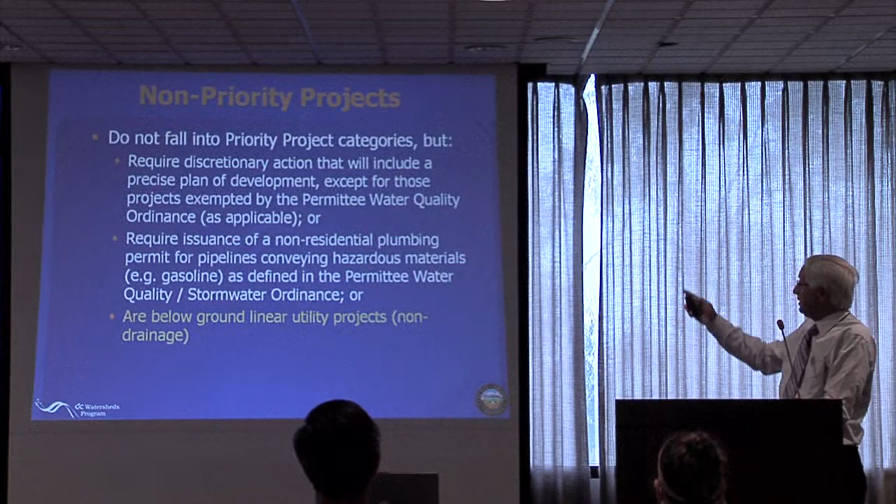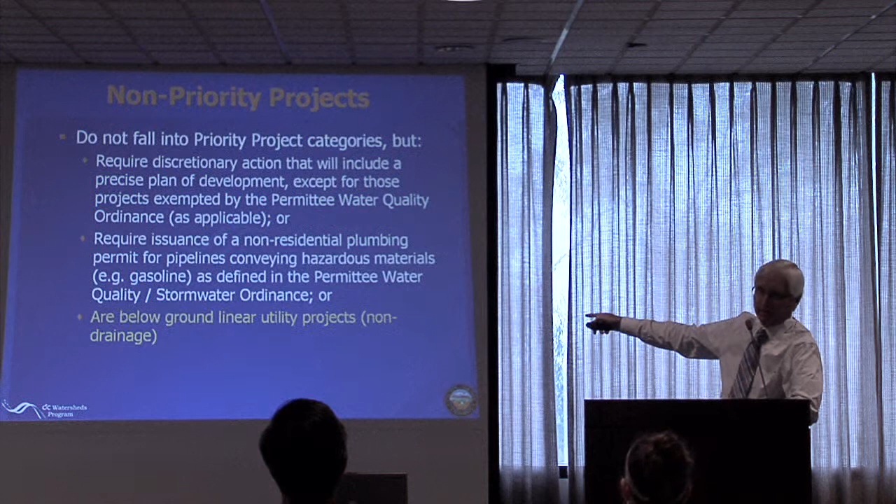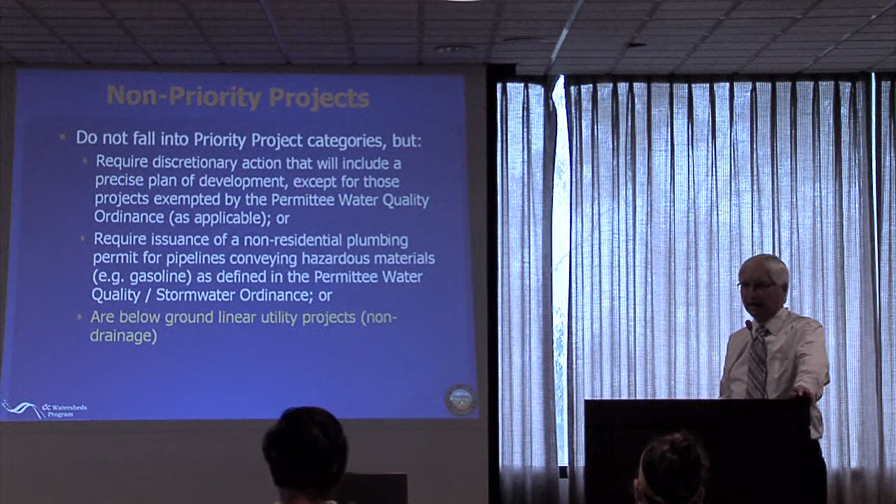So there's a lot that we believe do not fall in the priority projects category, that are also not non-priority projects. These are the same definitions that have been in your DAMP for a number of years, and the permit links back to them. We also added, as I said before, the Santa Ana board added this notion that below-ground linear utility projects somehow are going to have to be covered with a non-priority project plan as well. But all other ministerial projects, in our view, the permit and the WQMP does not—there's nothing overt in there that would say that any of these other kinds of day-to-day smaller building, small grading, single lot, all kinds of permit-by-right do not have to be covered and do not have to be brought into the new development program at all.

Okay, the template. There have been various forms of templates around in the past—many of you have used them. It is intended to standardize the process, to contain references and links back and forth. It can be adapted, but it should have all the basic pieces in it.

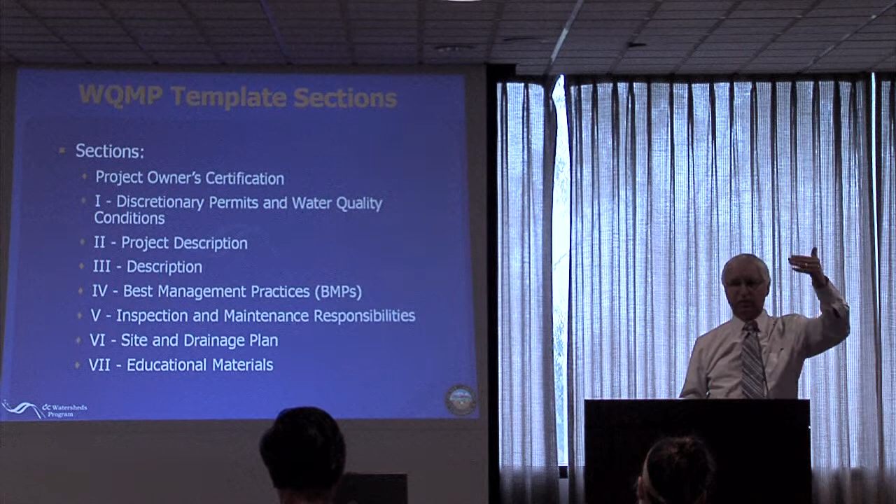The same sections that have been around in templates some of you have been using are still part of the new template. You can see those. They clearly link up with the similar steps in the process in the model WQMP. So you gather the basic information, places to put them in the template. A lot of the template is just blocks of information that lead you to look at the water quality management plan or the guidance document to figure out details of how to fill them in, but this shows the places where they go.

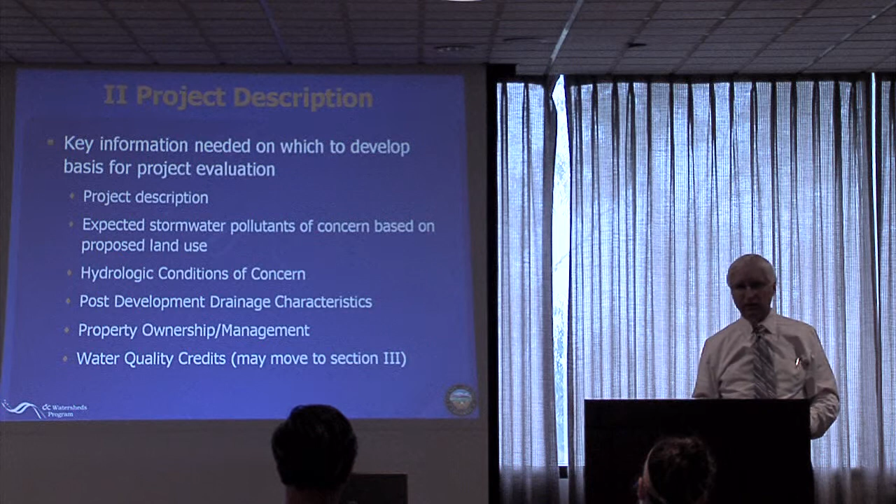Key information that has to be developed—each one of these has a place in the template to put it in. It guides the user, the developer of the template, to fill these in. The site description—same things we've been talking about before. There are places for it, and there's language in the template that walks them through what goes in there.

The biggest single section of the template, and the one that has been expanded most from the versions that have been out there before, is the section stepping a project proponent through selecting BMPs. There are tables that go through the hierarchy of LID BMPs we've been talking about, from infiltration to harvest and use, to biotreat and release, and finally treat and release before you get to the alternative programs. Each one of those has tables to check and a place that says, did you meet, and then you demonstrate in the template whether you met the design capture volume.

These are the ones I've used. Here's the calculations to show whether or not I met it. If the answer is yes, you don't have to go, you can skip the rest of the next several pages of the template and go on and finish the process of selecting source control BMPs, putting in your O&M plan, your maintenance, etc.

If the answer is no, there is a place in which you have to show, using the guidance that Eric was talking about, why this project cannot feasibly meet the design capture volume with LID BMPs.

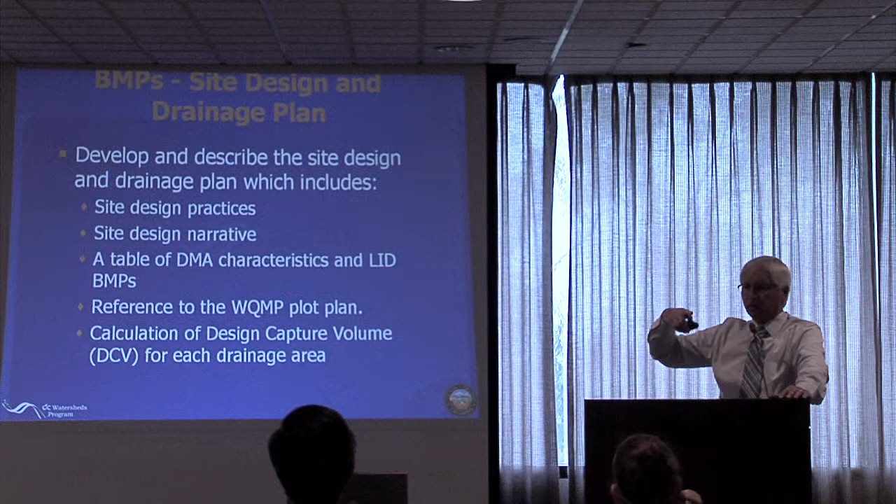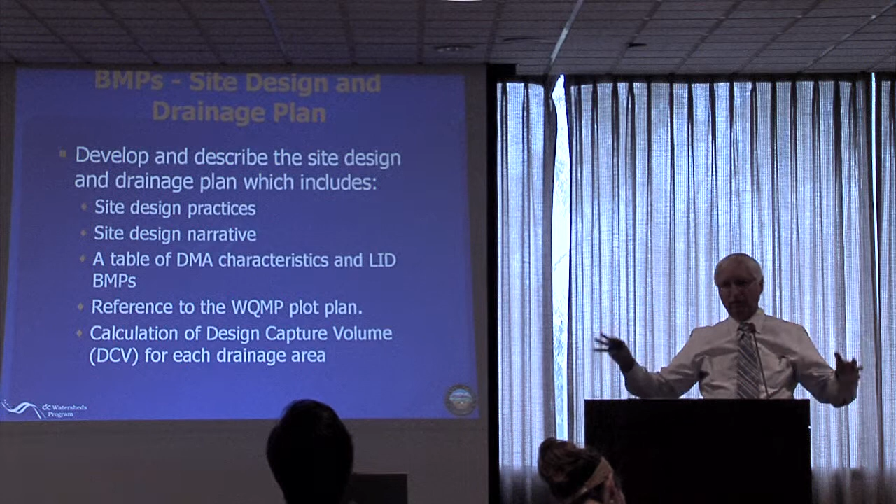Select the BMPs, do the plot plan, do the drainage management area characteristics. A site may be small, maybe one drainage management area. It may be a much larger development with 2 or 3 or multiple directions in which water may flow off the site. Each one of those has to be broken down and show how you've met them for all of those, and then you calculate that.

Then you do this conformance analysis, that's what I was just talking about. Identify the BMPs to be used and whether or not they can comply with the feasibility criteria, stepping through sequentially each of the major categories of BMPs.

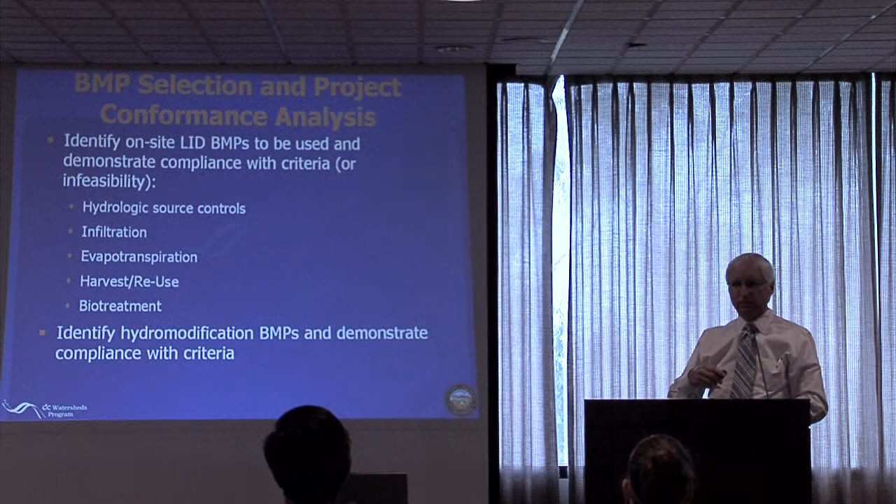If you have a project in which hydromodification issues, downstream susceptibility is going to be a factor, then there's a section in the template in which you describe what the project will do to address the hydromodification issues, addressing one or more BMPs to demonstrate compliance with the criteria.

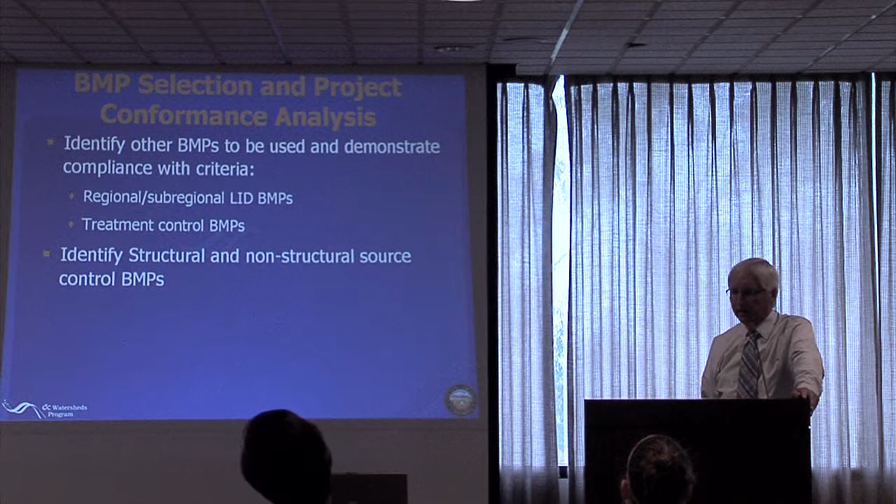And then finally identifying the structural and non-structural source control BMPs. So the template very much lines up with the model WQMP. It provides a tool to capture the steps, the process, and so forth for an individual project.

If it's not feasible for that project to meet the criteria, that's basically the capture volume for most projects, with LID and/or treatment control BMPs, then there's a place in the template. Next step in the template is for the project proponent to then describe what the alternative approach is going to be or proposed to be.

Of course, if you get down to that stage where the project proponent believes it's not feasible to do anything else, and is proposing to utilize some kind of an off-site project, we'll be preparing and filing a waiver, describing what the alternative approach that the project is going to use. And the waiver, as I said before, goes to the permittee, but a copy goes to the regional board staff for them.

And there is a 30-day window. I think maybe I said that before. Basically, it's alerting regional board staff that the permittee intends to, or at least the developer is requesting the permittee to approve the waiver and approve an alternative to LID approaches. The regional board staff doesn't have to do anything, don't have to act on it, or they may choose not to act on it, which is fine.

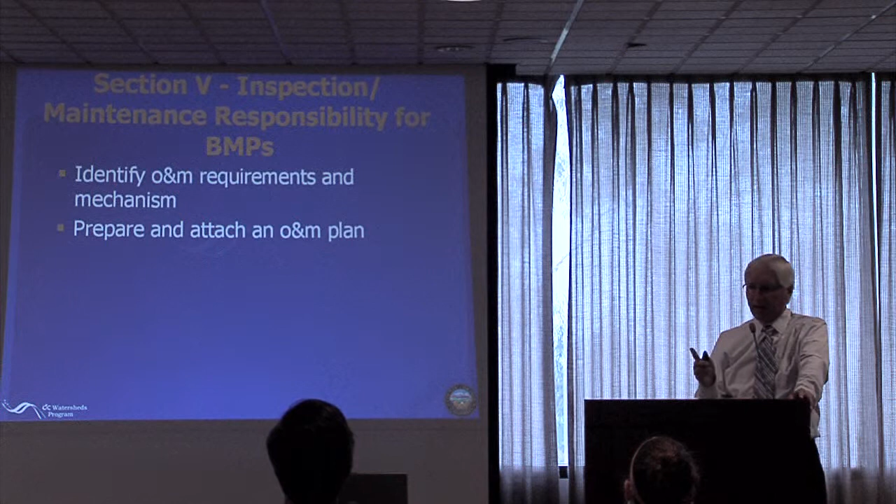The inspection and maintenance responsibilities for BMPs are pretty much similar to before. Of course, there has to be a maintenance mechanism identified. How that's done depends upon the long-term ownership of the site, whether there's an HOA or some kind of organization, and an O&M plan. Every new development with BMPs has to have an O&M plan. You have to review that as part of the project, and it becomes an attachment to the plan. At a minimum, the O&M plan and certain things need to be recorded with the project.

Okay, site plan and drainage plan and electronic data submittal. Some of you require it, some of you use electronic submittals. The WQMP template does not require a specific form of submittal, but it encourages submittal requirements, and that's something you can tweak as permittees in terms of how you want to manage the information and file it in your system.

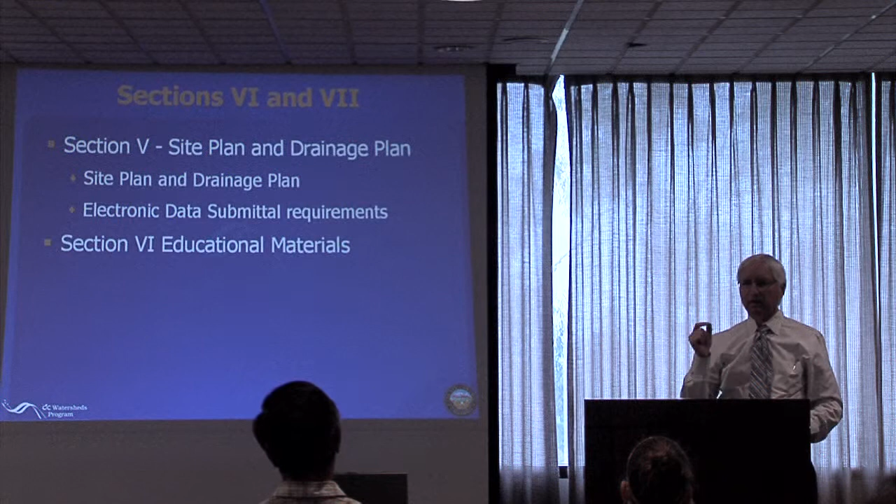Educational material is one thing that was coming up before. The way this template is set up, there are a whole lot of county-based or program-based materials that may be applicable and need to be passed on to homeowners or HOAs. But if they're county standard materials, they don't have to be attached to the document. You don't have to load the WQMP up with a thick appendix of materials already available through the website. But if there's anything unique or specific to the development for O&M materials, those have to be attached.

So that's really kind of a quick overview of what's now in the template. We're making a few tweaks. We even got a few comments recently, and a few from before. So we'll have a final template out very shortly.

There's a template for the non-priority project water quality plans, and we've talked about when this kicks in and when it doesn't. It's another, much simpler template. It looks a lot like ones some of you may have used before. It hasn't changed drastically - we've called it a plan now rather than a checklist. It goes through the same sourcing, and a permittee or project proponent would have to document site design and source control BMPs. Those are the primary ones still required to be documented.

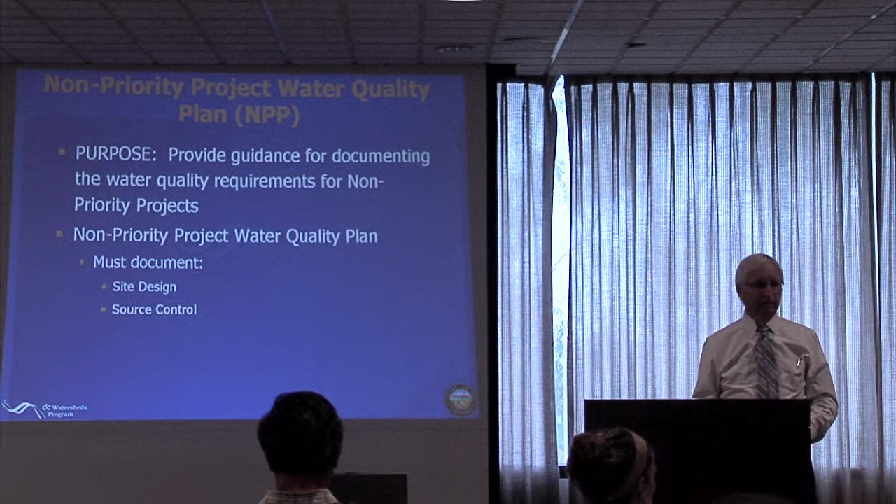There is no requirement to do a quantitative assessment of how much is being captured. The permit doesn't require that, so the template doesn't require that. This non-priority project plan mimics the water quality management template, but in a much simpler fashion, without the same rigor.

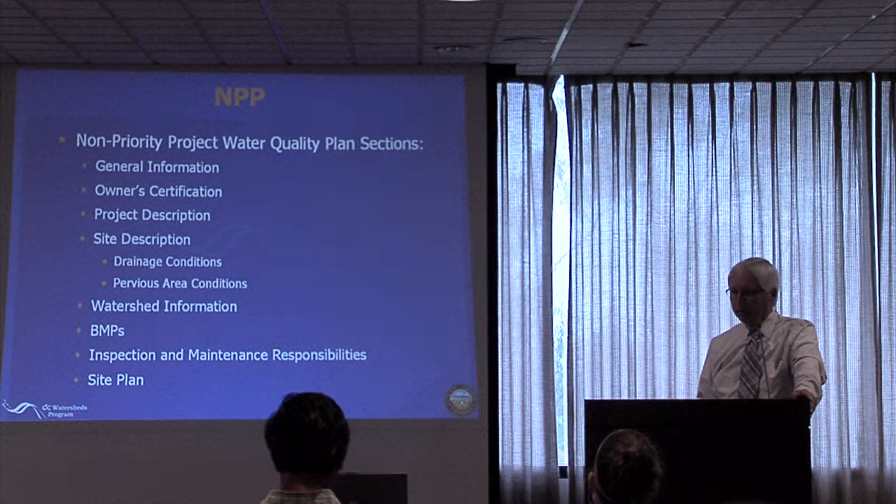The site design BMPs are similar to the ones that would be looked at and incorporated, but there is no mandatory requirement to incorporate any, all, or some of these. So that's a real quick run-through of these two templates that are available, and the final versions will be up and posted here shortly.

Yes? Standardized O&M language, is there anything like that in the agreement? Not really. I mean, the WQMP has a certain amount of language in it, but it's not a lot different from what was in there before in terms of what needs to be included in an O&M plan. There hasn't been a significant modification or expansion upon that.

What is different, of course, is that a lot of the BMPs will be different. So you won't have a lot of developments come in with a CDS unit or some kind of treatment. The LID BMPs do have a certain amount of O&M language - I think, Eric, if I'm right, in the fact sheets for the LID BMPs, there is some discussion about appropriate O&M, but we haven't done any kind of expanded, updated template, if you will, for an O&M plan.